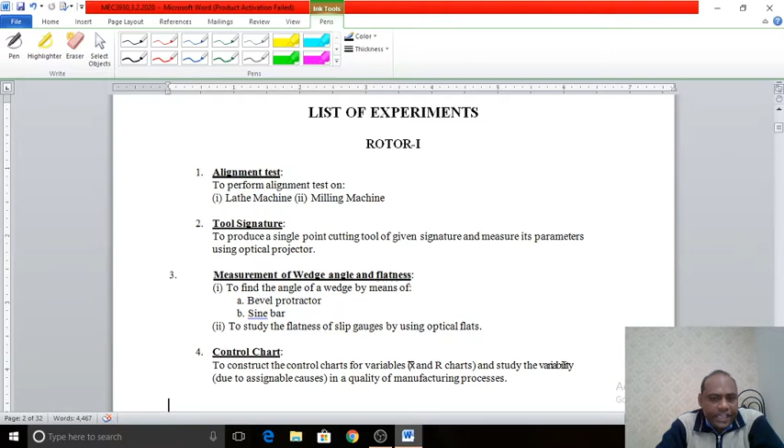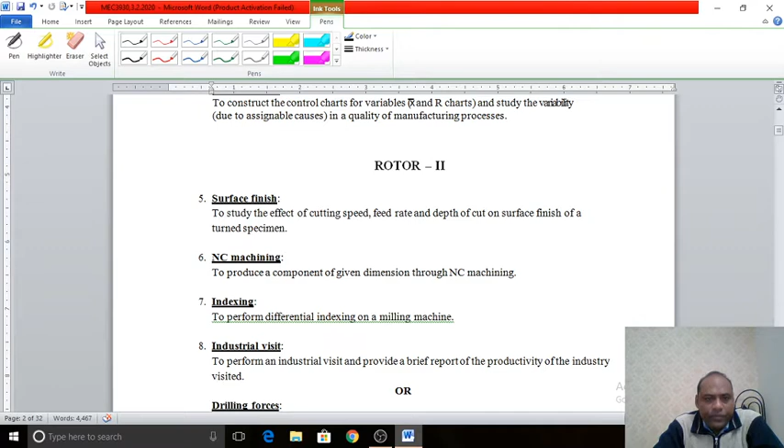the whole experiment is divided into two rotors, rotor 1 and rotor 2. In rotor 1, there are four experiments, that is the alignment test, tool signature, measurement of wedge angle and flatness, and control chart, and in the second rotor again there are four experiments, that is surface finish, NC machining, indexing, and the drilling forces.

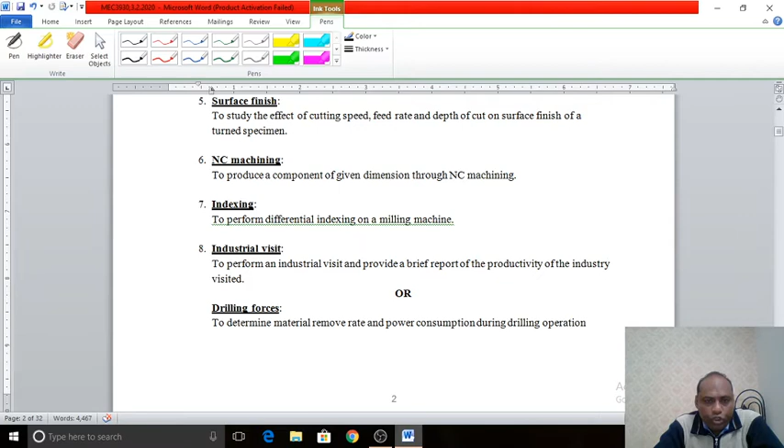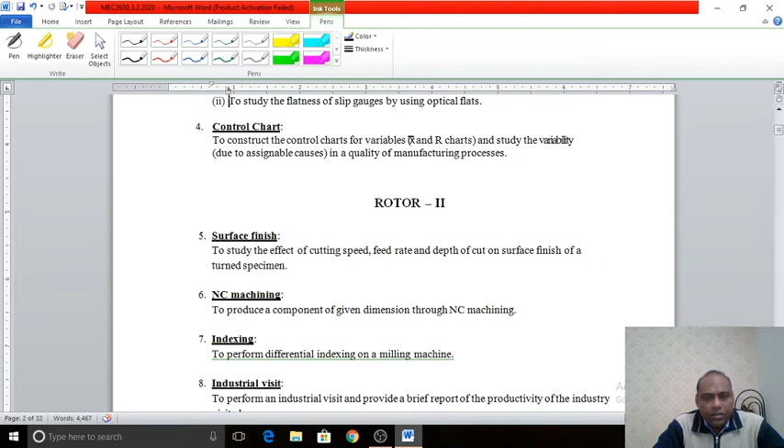So instead of indexing we will perform an Arduino Uno experiment for the automation of machine, so we will discuss that later. So we are just briefing about this whole lab. How will you perform the experiments during this time? Basically, we are just briefing about the lab, how the experiments are performed, how you will do the experiments.

Your first experiment is the alignment test. So why do we need the alignment? First, you have to think about that. What is the need and what is the meaning of this alignment? So generally, if we are talking about the lathe machine, suppose this is your lathe machine, this is your head stock. Here, you can say the job is mounted on that part.

Another is your dead center, that is the tail stock. Okay, so after the machine has been used a long time, or has been working for long hours, performing a number of operations, after long use of the machine there is some play in the chuck, some disturbance or some errors found in the alignment.

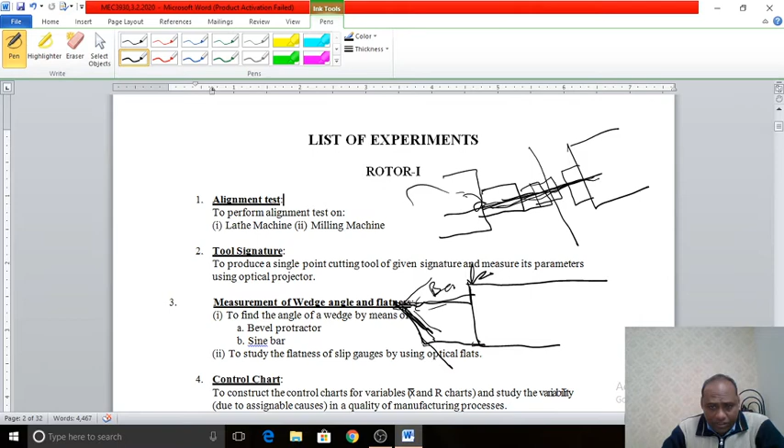And how will you perform this experiment? So first you have to give the angle on the machine, and after that you have to check on the optical projector. So there may be some error, because when you cut or when you give the angle to the tool on a machine, there may be a human error.

Suppose you are giving the rake angle 5 degree, so instead of 5 degree it may become 4 degree, or 6 or 7 degree. So this angle will be checked on the optical projector. We will discuss this during the experiment later, and the practical video will show you how to perform it. And the third experiment is your sine bar.

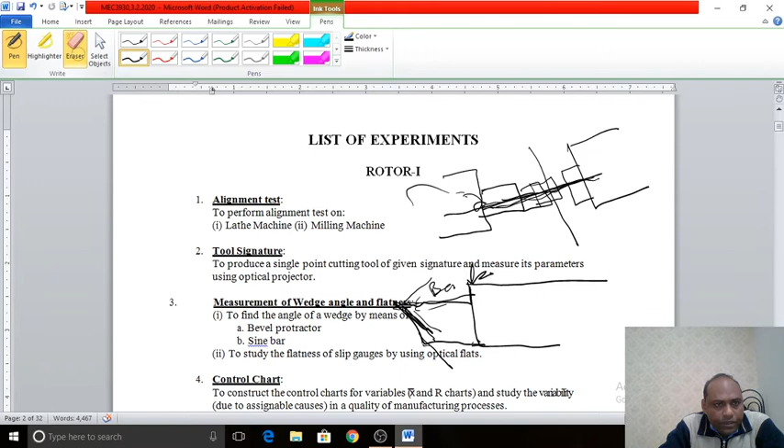So in this experiment, what will you do? As you know, sine bar. So in the sine bar experiment, what will you do? This is your sine bar. And the distance between these two centers will be given. In your lab, this sine bar has a center to center distance of 100 mm.

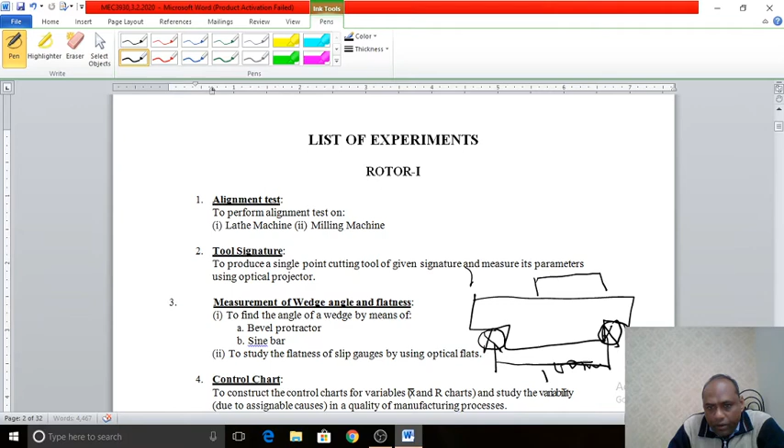So with the help of this, you have to place the object here. Suppose this is your wedge; you have to find out this angle. So you have to place the body here, and place the slip gauges. You know what slip gauges are, right? These gauges are put in one by one, and you find the angle using sine theta is equal to perpendicular upon hypotenuse. With this relation you can find out theta.

The practical video will show you how to perform the experiment. This angle is first measured by the bevel protractor, and then you find it with the sine bar, and see what the differences are between them. So in this study you will understand well. And the next experiment is related to flatness, whether your surface is flat or not, so we will check it. And the last experiment of this rotor is the control chart. So in the control chart, I'll just show you.

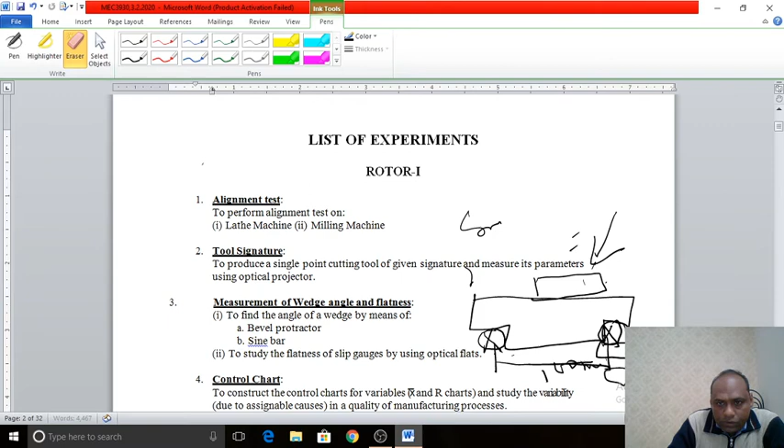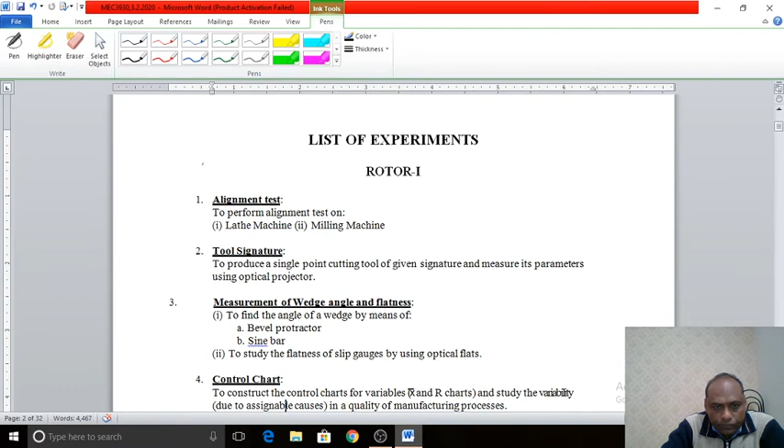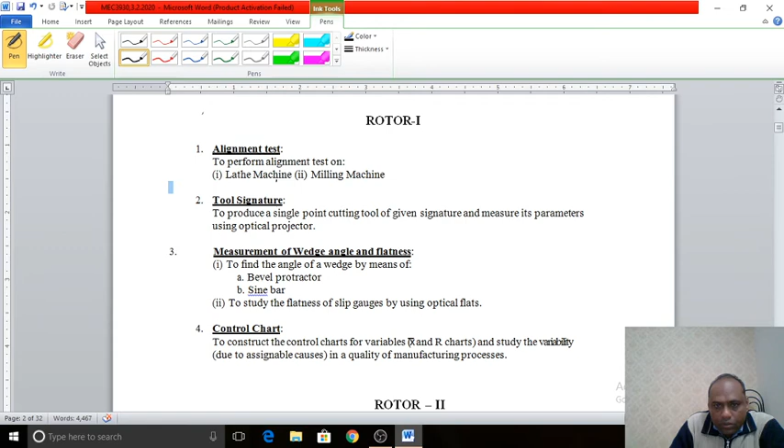In the control chart, as you know, there are two types of chart. One is your X chart, that is, you can say, variable chart. Another is the attribute chart. Variable means there is variation found during your process.

Suppose you are measuring the diameter of an object whose dimension is given as 20 plus minus 0.05. So your tolerance is given, meaning the process is valid from 19.95 to 20.05. If the dimensions lie between 19.95 and 20.05, then you accept the process. Otherwise, your product is out of the control limits, the dimension is not accurate, and the product goes into the reject category.

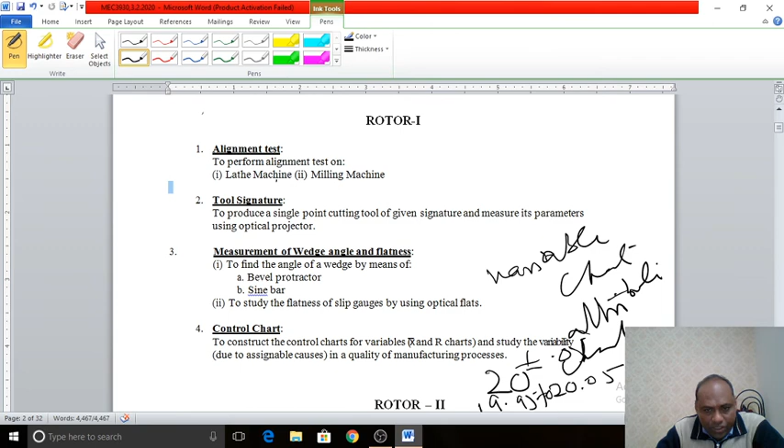If the process is out of these points, you need to check whether your machine is in good or bad condition, or whether your machine is capable of doing the work or not. All these things relate to quality control parameters during your manufacturing process. We will discuss all the parameters during the experiment, and the practical video will help you perform it. So this is all about rotor 1.